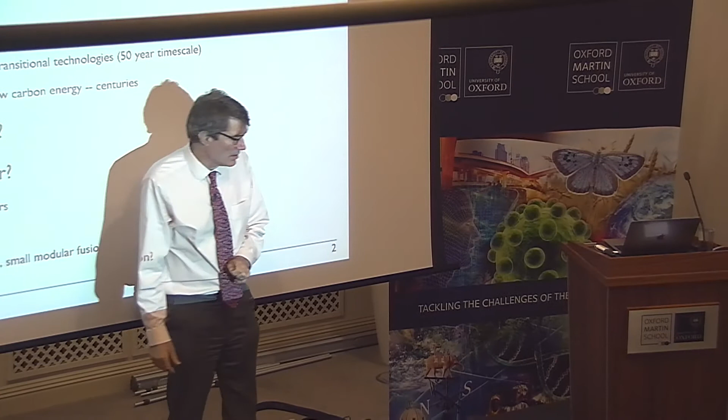And we really have to stabilize that issue. That's not an issue about decarbonizing, it's just an issue about making sure that we have enough capacity in our system, because if we have an accident in probably 2 major power stations, we will have blackouts, and that's probably too risky at this point to be in a situation like that.

The second stage, which is really the 50-year timescale, is about decarbonizing our energy supply at all costs. So here we might be looking at transitional technologies, technologies that don't really scale to the fully sustainable. They're not scalable to centuries. They're scalable maybe to 50 years, maybe to 100 years, but will have to be replaced by more sustainable technologies in time. But they are the technologies that we can deploy now so that we can start tackling the problem now.

And I look upon conventional nuclear to be one of these transitional technologies, and carbon capture and storage to be one of these transitional technologies. Then the stage 3, which is really on the centuries time scale of whatever plan you have.

This is way beyond the UK plan at this point, but the stage 3 would be the sustainable technologies that we can look upon centuries and millennia in terms of their applicability to supplying us energy. And there, I think we really do have to understand how we integrate a lot of renewables and possibly a lot of advanced nuclear too.

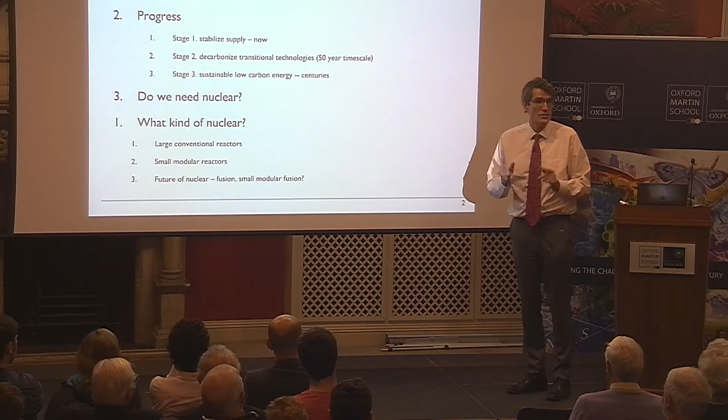Well, between 2008 and now, we haven't really even started building one of those nuclear power stations. And the question is, do we need to? What should we do with that issue right now? We have failed politically and economically on that problem, but should we still be pursuing it? I have an answer, but maybe I'll reveal it later.

Do we need nuclear, and what kind of nuclear? So actually, you can pretty much guess what the answer is because I'm going to talk about what kind of nuclear. But we'll talk about the problems that we're experiencing with the large conventional reactors. And Hinkley Point, which is supposed to be the first of the new generation of British reactors, is a poster child, really, for the problems that we're having with large conventional reactors.

There's an enormous amount of excitement in the UK now, and for some time in the US, about making small modular reactors that can be manufactured rather than constructed. So they're made in factories, they're put on big trucks or railway cars, and they're shipped to the site where they're deployed so that you have construction times that are in a few years instead of construction times in a couple of decades.

And whether that is a good idea, how it could be deployed, is a big question that our government is wrestling with at the moment, and there's a large consortium talking to government, led by Rolls-Royce, about whether small modular reactors are something we need to do.

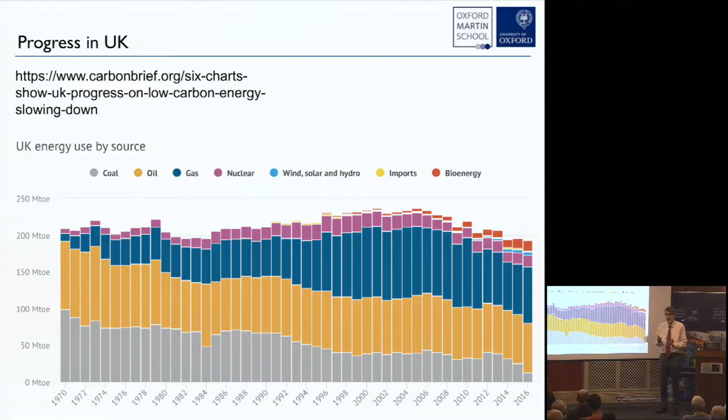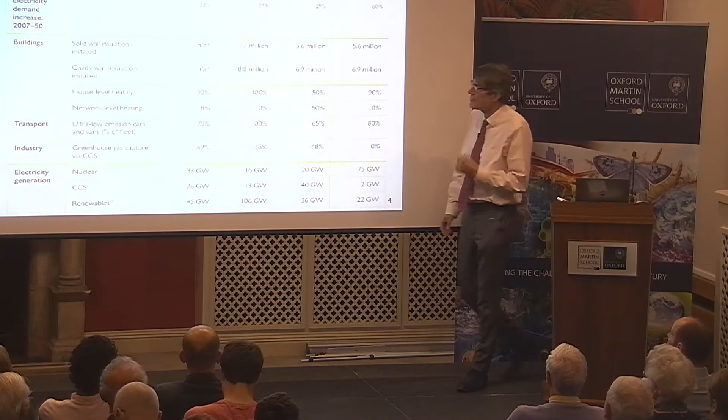Now, part of the problem right now, of course, is we have almost no new plans being formulated in government in Whitehall at the moment on any of these subjects, because we're very much focused on Brexit and all the issues to do with Brexit. So we have to go back to look at the carbon plans in previous times to see what government thought we might be doing in terms of deployment towards the 2050 goal, which is an 80% reduction in greenhouse gas emission from the UK. These are model scenarios, and this was in the Department of Energy and Climate Change 2011 carbon plan. And unfortunately, it's quite difficult to read this, so I'll point out some key numbers that are here.

This is basically, this is talking about what energy savings they assumed we could get per capita. So, for instance, this is 50% here, 54%, 43, 31. These are different scenarios. This is what they call the core scenario. This would be more renewables. This is more carbon capture and storage. And this is lots of nuclear right here. And the key things that we're going to be delivering, and the other part to this is that electricity demand will go up, because we're essentially using electricity to replace many other things.

I kind of like wandering around waving my arms about, if that's okay.

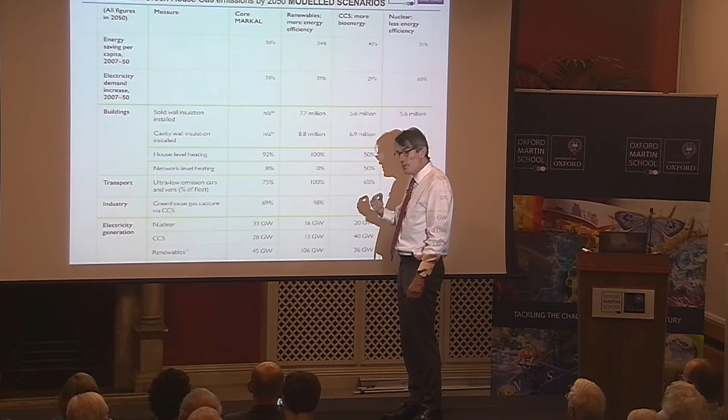The electricity demand increase assumed in these models was 38% here, 39% here. This is the kind of thing you're doing with heating and insulation and low emission cars, etc. They're assuming we can do a fair amount of carbon capture and storage within these scenarios.

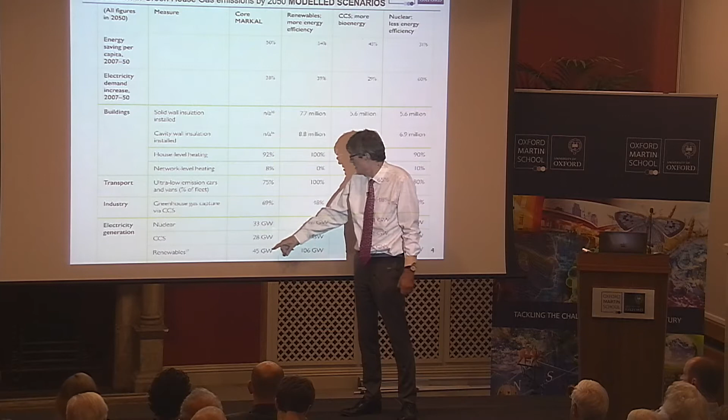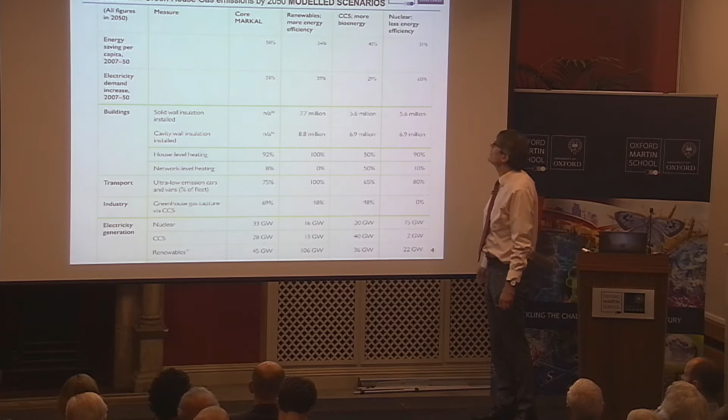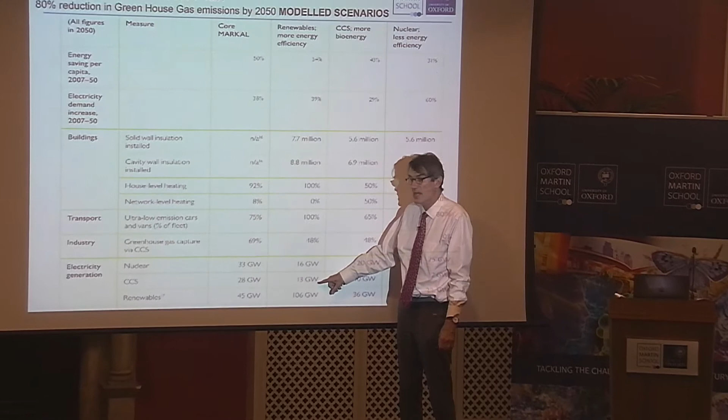Here in the electricity generation, for instance, there's 28 gigawatts. In the core scenario, there's 33 gigawatts of nuclear. We currently are at 10. 28 gigawatts of carbon capture and storage, and 45 gigawatts of renewables in that system. Right. If we look at the lots of renewables one, it's 16 gigawatts of nuclear, 13 gigawatts of carbon capture and storage, and 106 gigawatts of renewables.

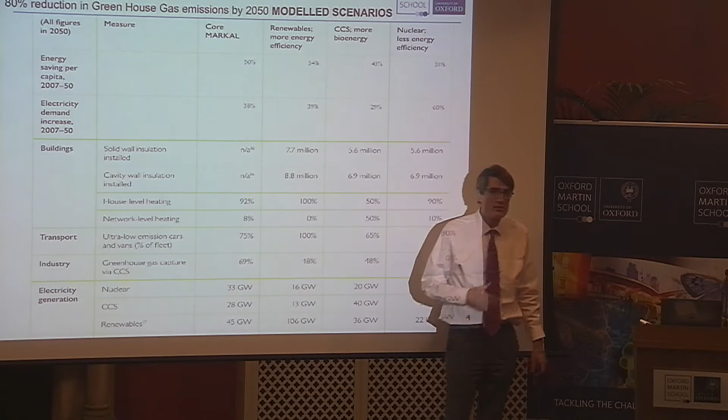Part of the problem with these scenarios is that there are certain technological things that would have to happen in order to make it possible, for instance, to work with 106 gigawatts of renewable capacity, and that probably means storage, certain kinds of backup, etc. Those are not modeled fully in the models that come out of this.

But this was the kind of thing, and I did want to point out, this is the big nuclear one, 75 gigawatts of installed nuclear capacity. Now, with your nuclear, you run it probably 90% of the time, so a huge amount of your energy in this particular scenario would come from nuclear power stations.

These were the scenarios in 2011, and David MacKay, who wrote that wonderful book Sustainable Energy Without the Hot Air, was the chief scientist of DECC at that time, and he was supervising the modeling that went behind this. It was the time at which we were looking to have a strategic look at what we needed to deliver to decarbonize by that time. Within government, there's been almost none of that since then. There's been some. Within universities, there's been plenty of work like that, and it's not my expertise, so I should really not say too much.

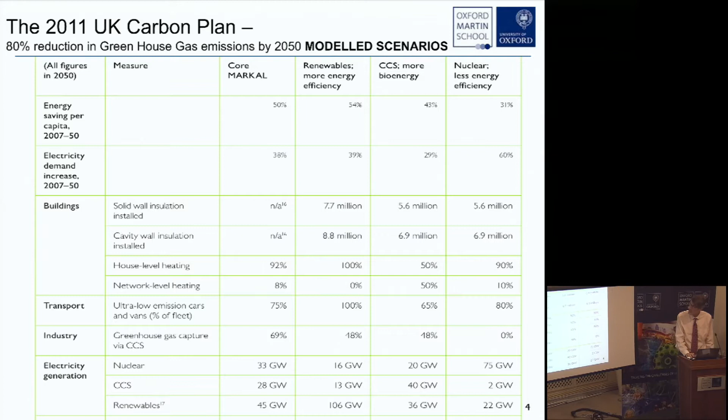I think what was great about the last few years has been that the cost of renewables is starting to make an important dent. 5 years ago, if you talked about offshore wind with investors in renewable energy, they would say, not touching it with a barge pole. What you really want your costs to be is around £50 per megawatt hour. That's what you want your cost of electricity to be competitive on the market right now. The cost for offshore wind was peaking up at 130, 140 pounds per megawatt hour. That would make it extremely non-competitive in the market.

And yet one of the big hopes for the UK is to deploy a lot of offshore wind in places where people don't worry so much about having something in their backyard, and where the wind is very consistent, so you get very little intermittency in the power generation. What we've seen is actual delivery of offshore wind around 97, 100 pounds per megawatt hour, but we've seen auction prices now dropping to around 57 pounds per megawatt hour. So we're seeing offshore wind catch up here.

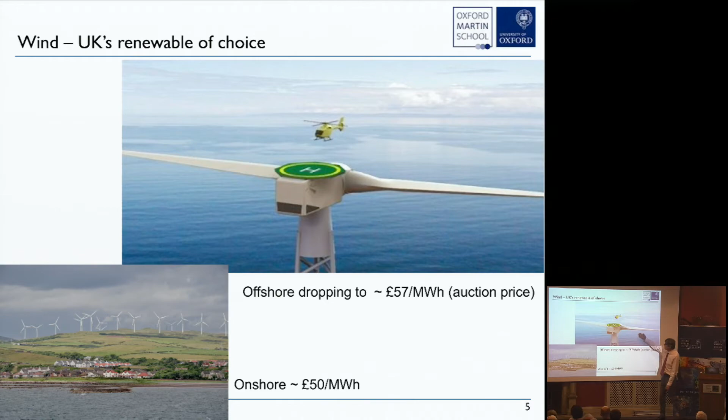Part of that is to do with sorting out the financing, but part of that is also sorting out the engineering. There was an initial phase of putting in offshore wind turbines with a lot of engineering hiccups and a lot of time taken with maintenance and construction, and we were learning on the job. About 5 years ago, there was a complete dip in confidence by government and investors that this would really work out. But fortunately, people persisted, and a very short time later it's starting to pay off. We will be installing, I think, some tens of gigawatts more in the next 5 years, which will make a huge difference to us.

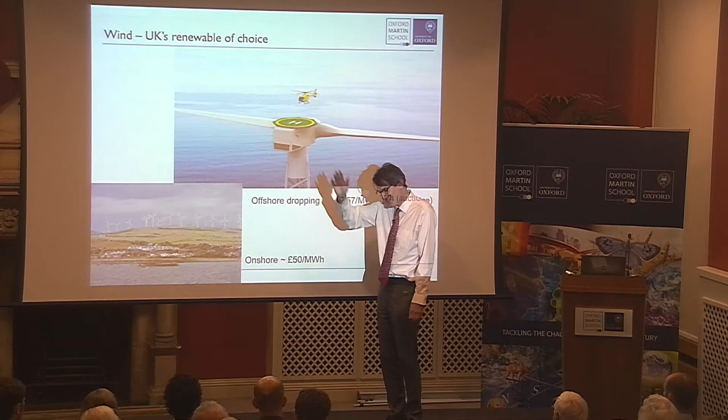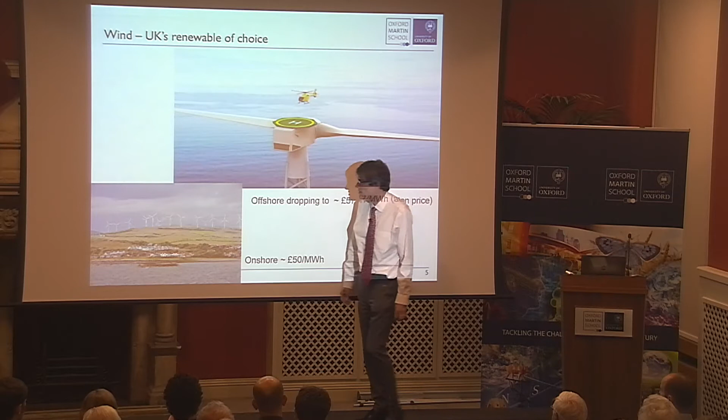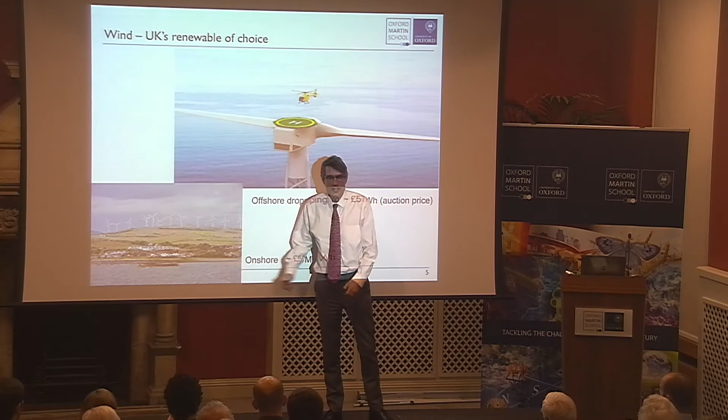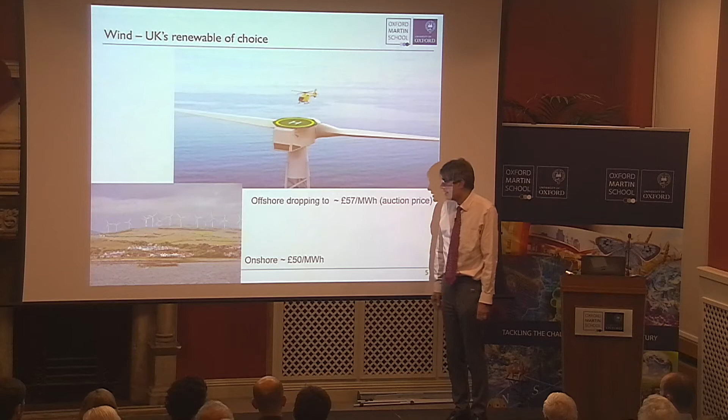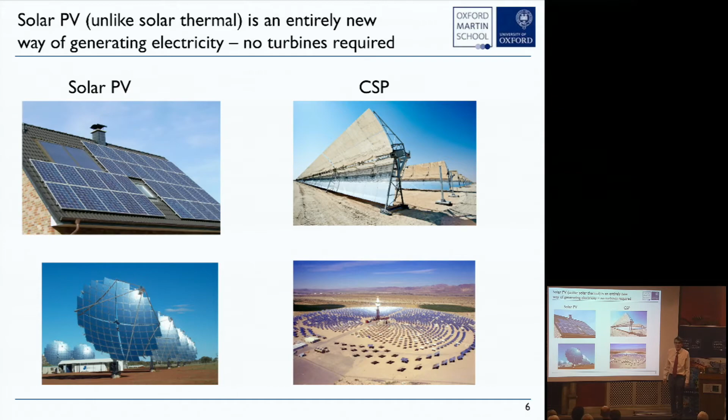Unfortunately, they were essentially driven out, because the Chinese got into the market of making photovoltaic silicon photovoltaics, and the price...

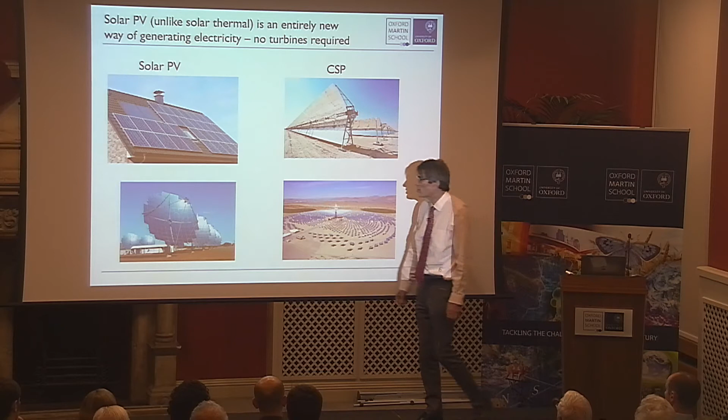...has been coming down absolutely remarkably. And they're starting to be a very cost-effective way in sunny climes to make electricity.

I'm not going to belabor this point, because I'm not an expert, and because at Oxford we have some wonderful people in solar, but this is something I think you may have seen last week.

It's about the price of solar energy, essentially for a kilowatt hour, coming down with time. Here's 2000.

Here's 2050, here's 2000. Of course, it's extrapolation from here onwards.

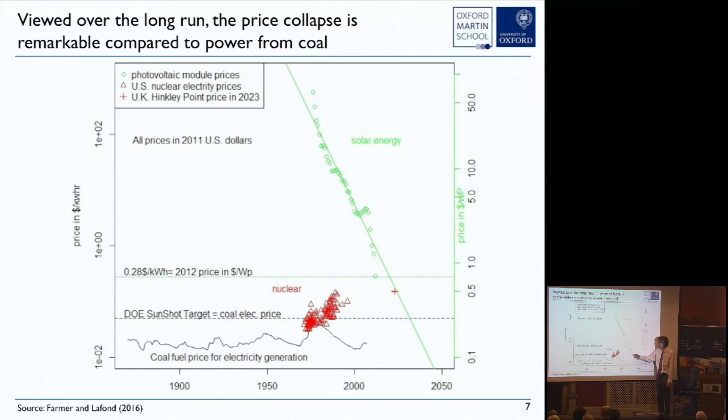This is the price of nuclear electricity existing. This is, unfortunately, the price projected - well, it's what's called the strike price, the guaranteed price of electricity coming from Hinkley Point, which will be our next, which may be our next nuclear power station.

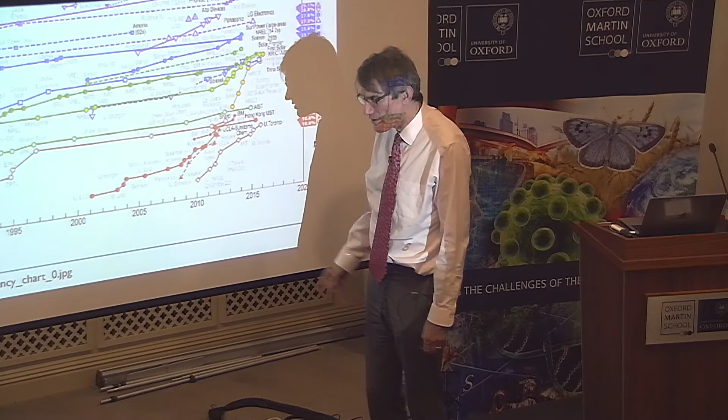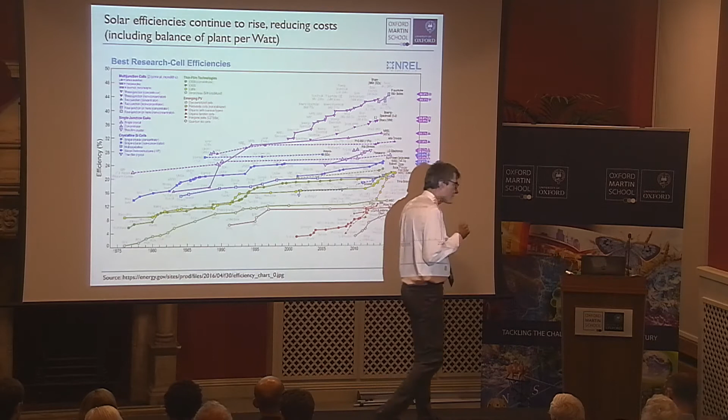I think one of the things here, as a scientist, is - and we've got some marvelous work going on here in Oxford in Henry Snaith's group up in physics and his company - there's a lot of innovation going into the next generation of solar cells, and the efficiencies will go up.

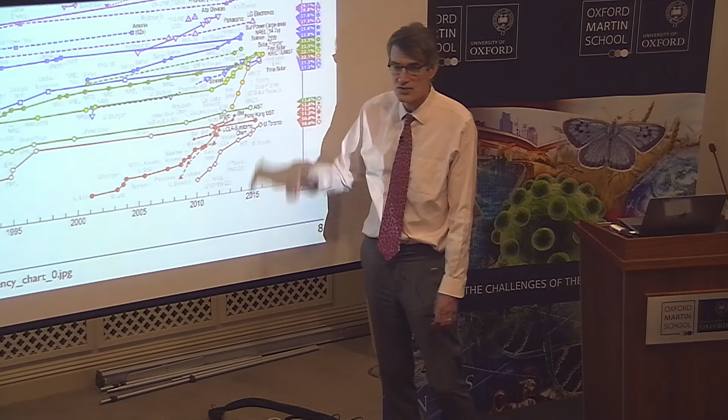Every time the efficiency goes up, it becomes more and more cost effective to use those cells. I think the efficiencies have to go up more than the prices have to go down now, because the prices are so small that really it's not the solar cell itself that's costing you money.

It's all the other things that go around it - it's the aluminium frame, it's the wires that come in, it's all the other things. And so the only way we can actually drive the price a heck of a lot more down is to get more from the same area.

These rises in efficiencies - this is basically the efficiency in percent - and we're working around 15 to 20% efficiency with the standard installations at this point.

If we can push that up by 50% or 100%, it's just a direct impact on the cost and effectiveness of photovoltaics.

This is all very encouraging. Five years ago, we didn't think like this. We didn't even think that photovoltaics would have any impact at all on the UK, and it will have some - much better in Spain, much better in Southern Europe, obviously, than in Northern Europe.

I think in Germany the analysis is probably that of the renewables, 20% might be in photovoltaics, and the rest will be in wind, in terms of a sort of optimal mix of what you might do into the future.

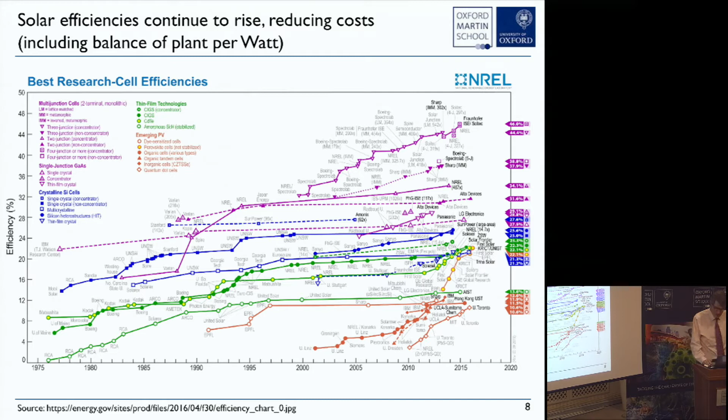The fact that renewables are coming in much faster makes me very happy, because one of the things that was very worrying was we keep finding more gas, more oil, more hydrocarbons, right?

We're never going to be in that situation, which we thought maybe 40 years ago, that we would just run out of hydrocarbons before we had blown the atmosphere. But the problem now is we've got so much hydrocarbons, and nice cheap hydrocarbons, that we could go on using them essentially forever.

Unless we have political agreement that we're not going to dig them out of the ground, and we're going to leave them in the ground, what we've got to do is make renewable ways of making energy cheaper than using the hydrocarbons. That way we don't have to rely on Mr.

Trump agreeing to the Paris Accord. That way we don't have to rely on countries like Russia, etc., because people will be driven to use renewables because they're cheaper. And that would be more convenient, and I hope that some of that will happen.

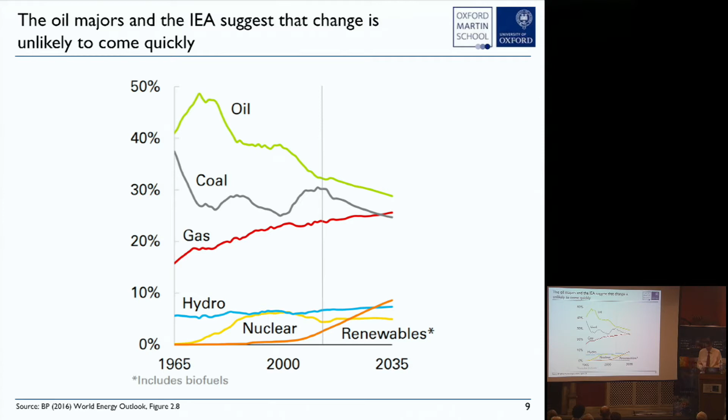Just to give you a scale, a typical day on the British grid in terms will peak at around 40 gigawatts of power being delivered.

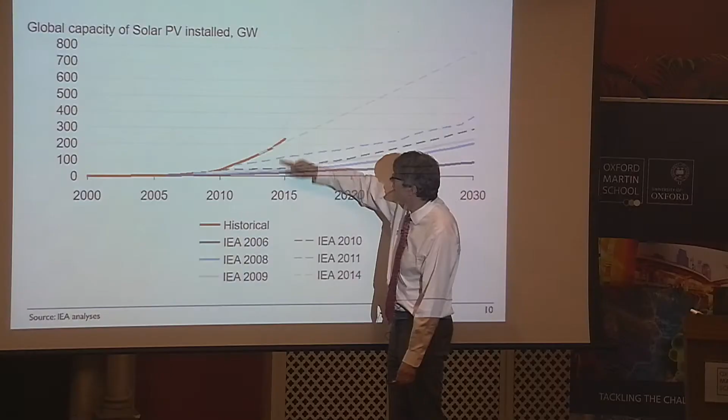They were constantly following the actual line, which is this dotted line here, and adjusting upwards and upwards. There is actually, this is the physicist in me, a second derivative here, so the slope of the line seems to be actually increasing. So probably modeling it this way is not the way to do it. But I think that's remarkable. I don't remember a technological change that caught us so much by surprise against our own predictions.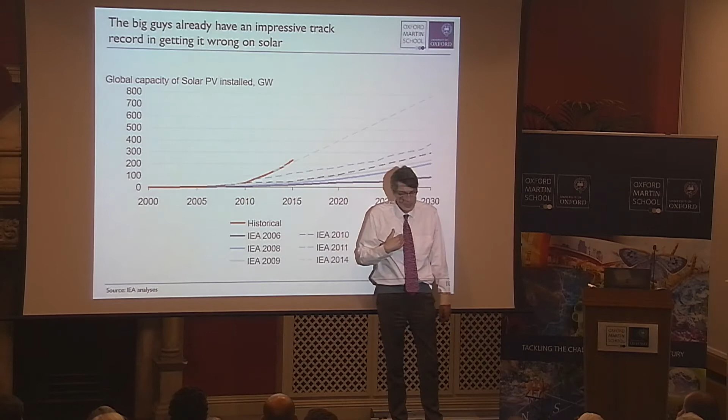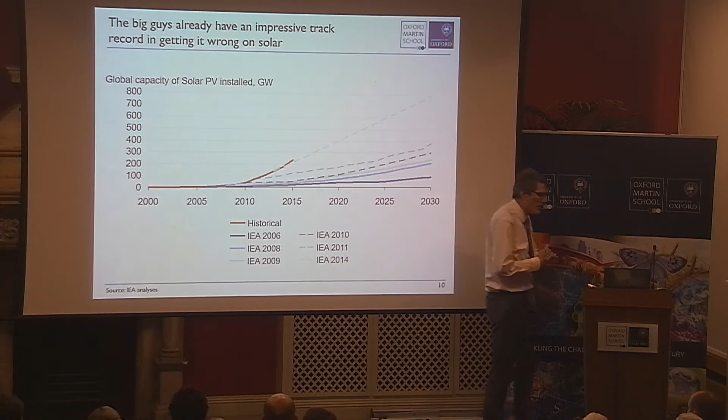Now there are all kinds of ways in which you might say, when you first enter the market, you're going to take the best sites for what you're doing, you put it in the best places. All those things probably are in these figures. But I think we understand that photovoltaics are going to make a big difference to the worldwide energy problem. Probably much less to the UK, more in the line of 10 to 15%.

So this looks great, right? And now we're going to move forward and say we can power our country by renewables, but we can't, actually. And we can't because renewables are not on all the time.

Because photovoltaics only work in the daytime. That's one reason. They work a whole lot better in the summertime than they do in the wintertime. Because the wind is very intermittent, and we get wind power sometimes - we will get nasty, dark Decembers with no wind power, as we did about 2 years ago, in which you just couldn't rely on renewables at all.

A nice analysis of this is given in this paper by Fritz Wagner in 2016, where he is working in Germany and concerned about the gradual erosion of what we call the baseload of the electricity system. That's the things that you can turn on and leave on. Nuclear power stations are like that. They basically operate sort of 90% of the time, and they give you a chunk of the electricity that doesn't go up and down, and you can take some of your load that way.

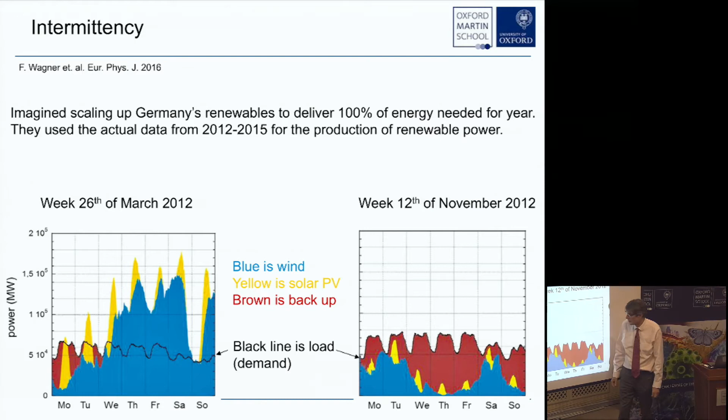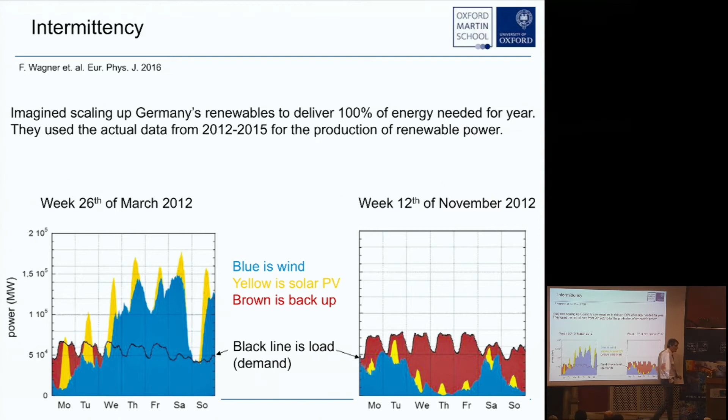If you look at this week here, the 12th of November in the same year, you'll see there wasn't very much wind power and there wasn't very much solar. During that week the backup system was matching the power. This is a well-known problem. They're nowhere near the first people to have worried about this, but it's an interesting analysis because you can quantify with actual data from the system how much of a problem you really have in matching this, and what you'd have to deliver to flatten out the supply.

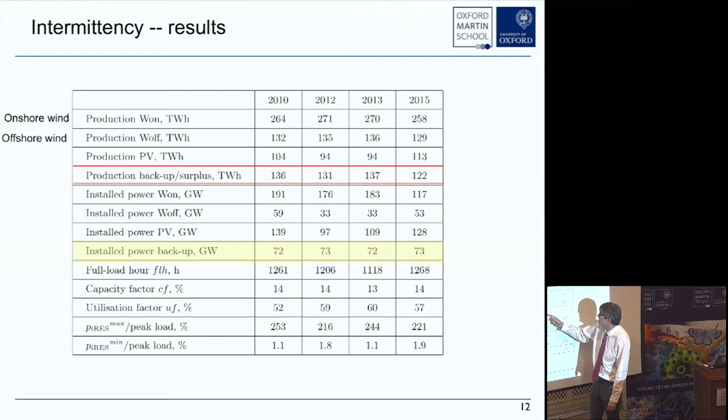What's interesting is, in order to handle those moments when you have no renewables, you've got to put on 72 gigawatts, 73 gigawatts, 72 gigawatts, 73 gigawatts of backup power. And you're delivering quite a lot more backup energy than you've actually delivered in photovoltaic energy during that year, even though you scaled everything up that much.

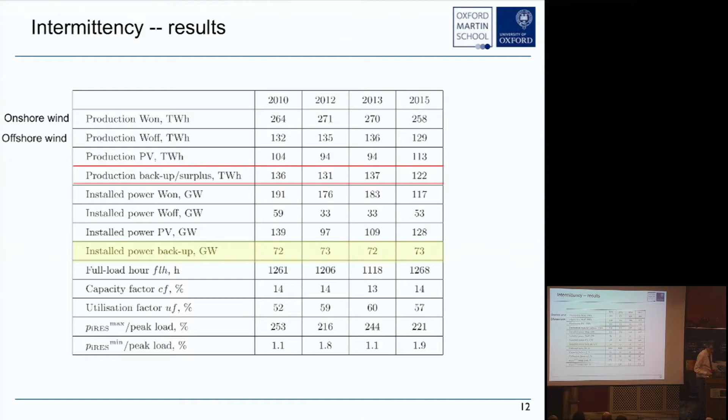Understanding how we cope with that fluctuating load is a technological challenge. And doing it with backup, if we did this with standard backup now, that would have to be something like gas turbines, which would naturally produce carbon. Maybe this would be a natural way to use your carbon capture and storage for a period of time. Maybe that's what you would do with these sources.

I'm not as sanguine about this part of the problem as some people seem to be, but I'm not an expert on energy storage.

Elon Musk is delivering to South Australia the world's biggest battery, that's what it's hailed as. It stores 129 megawatt hours. So basically 6 minutes of Dinorwig power station.

Battery storage for any long-term fluctuations in the grid is a long, long way from being something we're capable of doing. For short-term storage, it's already being deployed, but that's actually very short term. Maybe on the day time scale or the week time scale we'll be doing battery storage, but it's unlikely we'll be doing anything over seasonal length scales - months, 6 months, a year - being able to store energy produced in the high winds of the autumn gales for the middle of winter. That will not, in my view - batteries will never scale to that kind of storage.

And I think we're going to have to look at a variety of options for how we cope with that.

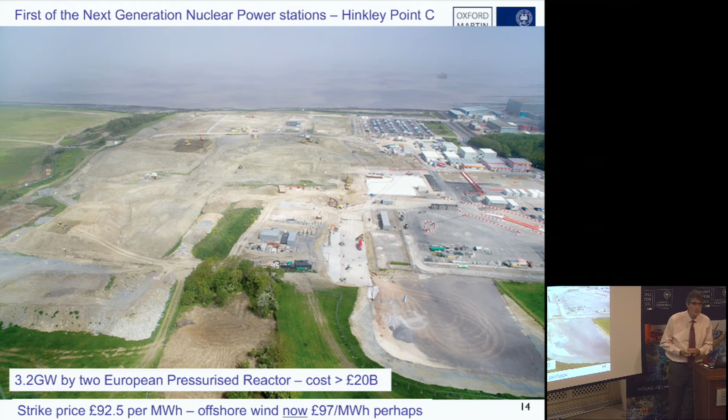By 2025, most of our nuclear fleet will have reached the end of its lifetime. Most of our nuclear fleet is these advanced gas-cooled reactors. They have had life extension after life extension. And as they do, we have turned down the wick on them. Basically, we don't run them quite at full power anymore because they're getting older, and we want to stay in a very safe condition on those reactors. And they're marvelous. They've been extraordinarily safe and good for us. But by 2025, only Sizewell B will still be with us.

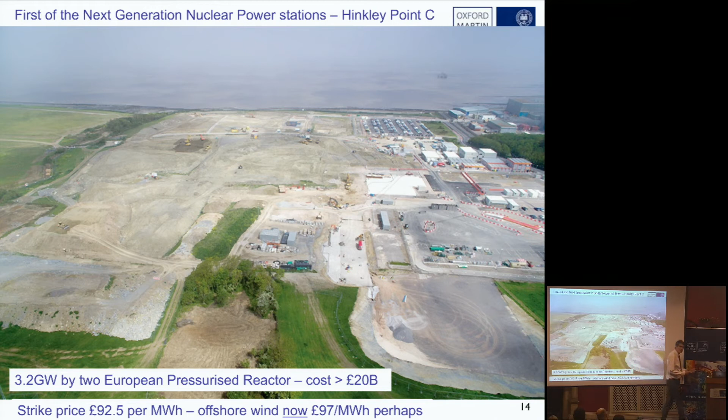So if you get started on building these reactors now, given the rate at which we build reactors, just about by 2025, you'll have 3.2 gigawatts of nuclear power coming online, just as you're losing about 8.5 gigawatts of nuclear in our scheme.

Why is it so expensive? If you take the weight of a nuclear reactor and the amount of concrete in there, and you just built a Jaguar Land Rover that weighed that much, and built a motorway with that much concrete in it, you'd be talking about $1 billion, $1.5 billion worth of stuff. Building nuclear reactors costs much more than the stuff that's in it. The intrinsic cost is very, very low. The cost is all in the waiting around, the licensing, et cetera, right?

It's all to do with the ways in which we keep it safe and keep it licensed and work with that. So people have argued that the problem is that these things are constructed on a site where you can't license them. Now, aircraft engines are constructed in a factory. You put them on a production line. At the end of the production line, they're inspected, they're licensed, and they're put into planes and they fly. I mean, they are re-inspected in the planes, but it's not a long process.

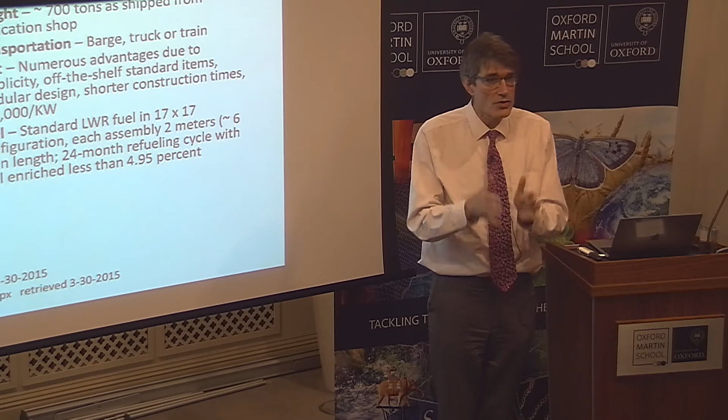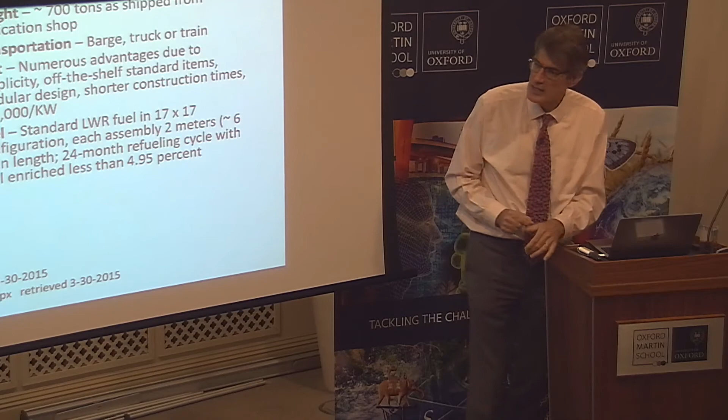The argument is that we ought to be producing nuclear reactors like we produce aircraft engines. We ought to be producing ones that can be made in factories and transported to the site as a thing that you basically plug in. You pour a little concrete on the site, you plug this in, you link it up, and you get it online within a matter of 2, 3, 4 years from the beginning of construction until delivery of electricity. If you could do that, you cut down so much of the cost that's been in Hinkley Point. The cost in Hinkley Point is really the money sitting around for multiple years while you pay interest on it.

So if you could actually make these things, if you could make essentially a factory that produces small reactors, they're called small modular reactors, you could deliver them to the site. Instead of having 2 big ones at Hinkley Point, maybe you have 20 or 15 of these. They're much safer, smaller reactors that are intrinsically much safer because they have more surface area to volume ratio.

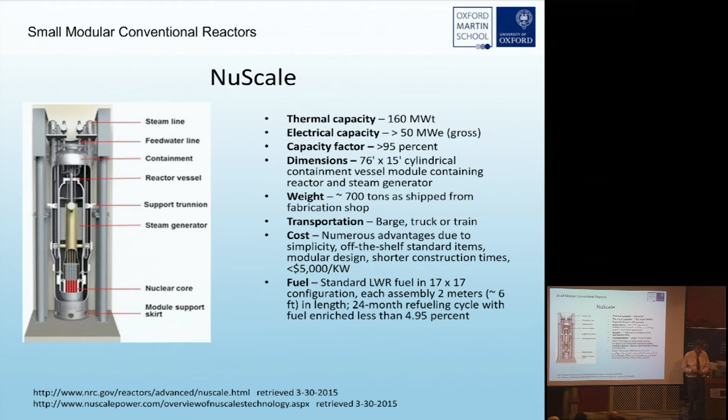It seems like a very good idea. And round about 2000, the US started to put lots of money through the Department of Energy into plans to build these kind of reactors. They've yet to actually make a prototype, but this is the company that they've poured some money into, NuScale. This would actually be a 50 megawatt reactor. And NuScale have been talking to the British government about what it would take to have them deployed in Britain and sold in Britain. The excitement in Whitehall at the moment is of a consortium from Rolls-Royce.

Now, Rolls make a reactor. They make a reactor for the British submarine. It's not the kind of reactor that you would put in a civilian situation, but they have the whole supply chain. So this could be an entirely British-made reactor. They have all the components, all the manufacturing capability to build all the pieces of the reactor, and they've put together a consortium and appeal to the British government that this is probably the way forward in nuclear.

Now, these are very standard reactors, just like the big ones except scaled down. 220 megawatt reactors in pairs is what they're suggesting as a deployment. They have a 60-year lifetime, and they say they could deliver the first reactors by 2028, then roll them off a production line, one every month or two, in order to supply. The target electricity price they're aiming for is 60 per megawatt hour.

I don't know if this is possible. They certainly have a plan to do it, and part of it is that unlike big reactors, you're making many of these, so you learn from the first one, the second one, the third one, and the price comes down. If you look at photovoltaics, that learning is a crucial part of driving the cost down. It's never really happened before in nuclear, except possibly during the 1980s when France built its big nuclear fleet, building one reactor a year with the same people moving from site to site. That's pretty much the only time nuclear has made any money.

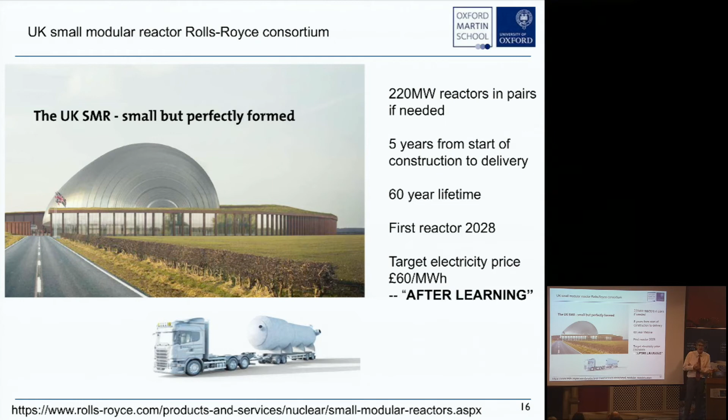So this would be a very bold step. But we're going to have a hole in our electricity generating capability, and if we're not just going to fill it by burning more gas, we have to do something like this.

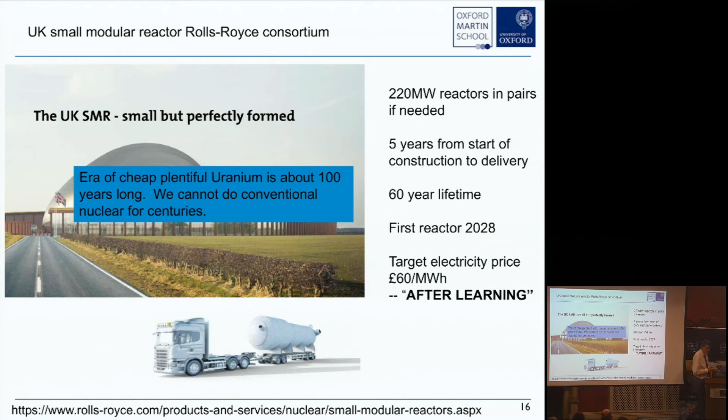There's a thing you don't often hear: it's a stopgap measure, because we don't really have enough cheap uranium to supply the world with a baseload of nuclear for more than about 100 years. It's of that order, though exactly what the number is, is difficult to say. You would have to go to advanced nuclear systems.

I'll say a little bit about fusion, because that's my thing and I enjoy talking about it. The ultimate way, probably the perfect way, to make nuclear energy is from fusion reactions: taking small nuclei of atoms, joining them together, and making larger nuclei. By far the easiest reaction is between two isotopes.

Two isotopes of hydrogen: this is deuterium, heavy hydrogen. Hydrogen has one proton in its nucleus. One proton plus one neutron makes deuterium. One proton plus two neutrons makes tritium. There's a beautiful reaction between deuterium and tritium that makes helium and a neutron. This helium comes out with shed loads of energy, and so does the neutron. If you take that neutron and bombard lithium, you can make tritium, which doesn't exist in nature, plus more helium. So the fuels for this way of making energy are lithium and deuterium.

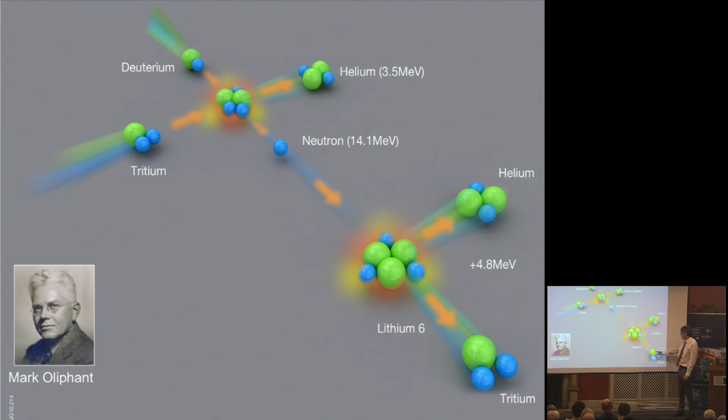There is 60 billion years' worth of deuterium in seawater, and 30 million years' worth of lithium in seawater. It's about 0.2 milligrams per liter of seawater, and it's efficient to separate it out for fusion, but not for batteries, as it turns out. This reaction is great, except for one thing.

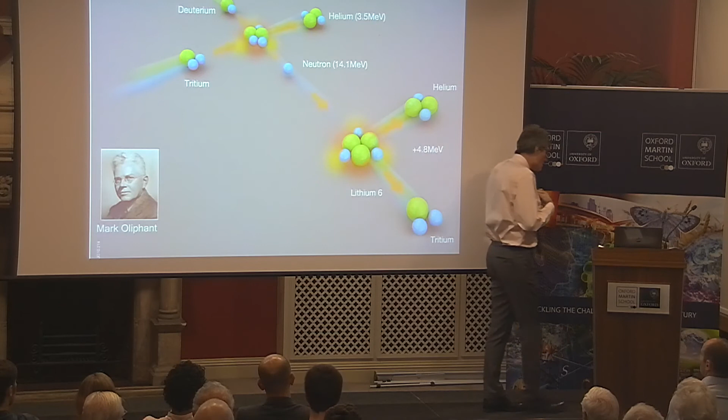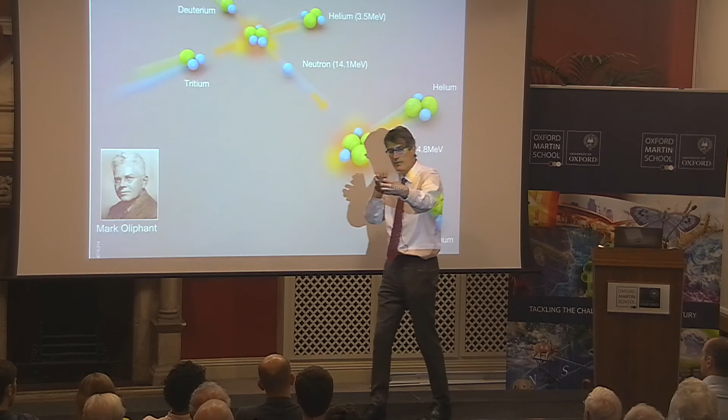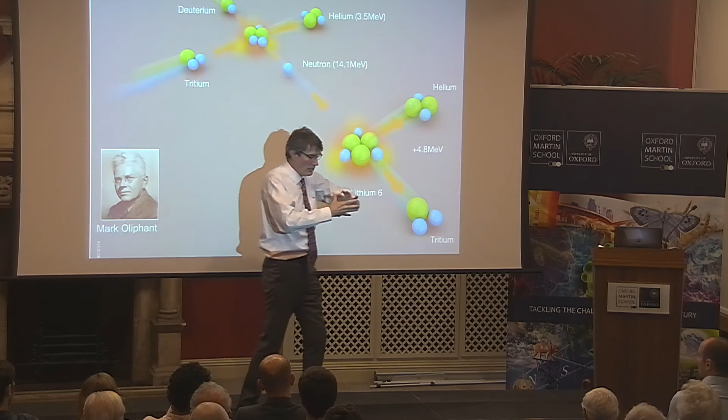In order to make this reaction go, you have to ram your deuterium and tritium together at velocities of order 1,000 kilometers a second, equivalent to temperatures of order 200 million degrees. You have to create deuterium and tritium at those temperatures, hold them in some kind of containment, and let them bump into each other until the fusion reactions occur. Typically they'll glance off each other in any collision, and only when you hit them smack on do they get close enough that, for a moment, they form what we call helium-5, with 5 particles, 2 protons and 3 neutrons, which then splits into ordinary helium-4 plus that neutron.

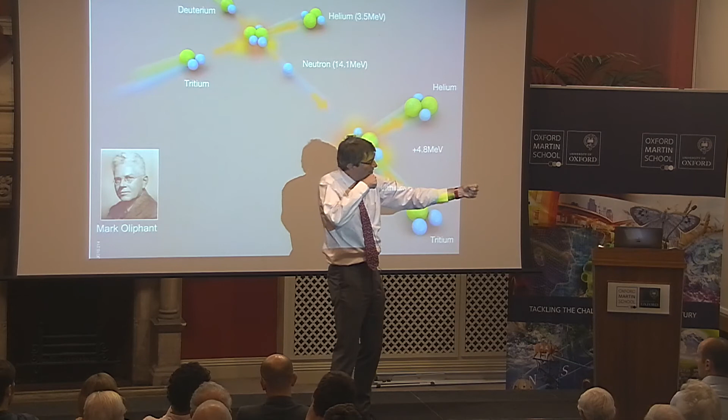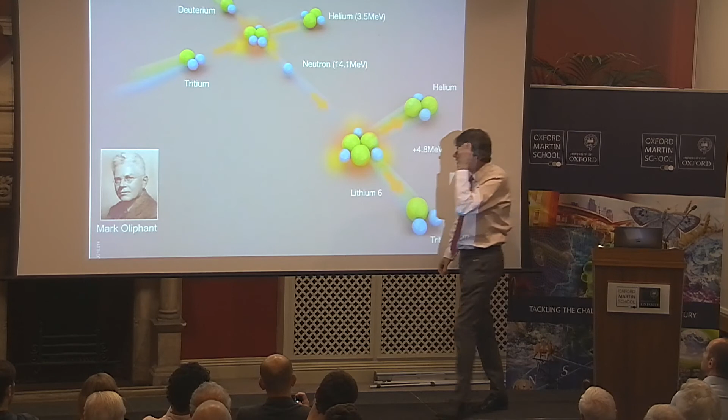When they get close enough, they repel each other until you get very close, and then they grab each other and fuse. We've known about this reaction since Mark Oliphant discovered it in the early 1930s. We've known it would be a great way to make energy, but it's really hard to heat anything to 200 million degrees. We can do it now, but only in very, very large devices.

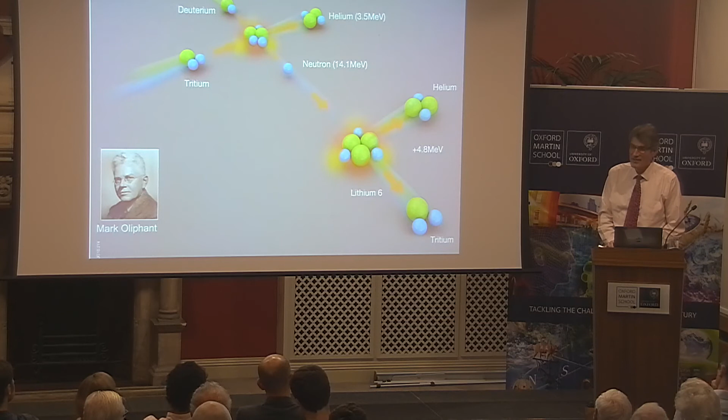So I'm going to go back to this. The world decided, around 2004, that we ought to try and actually achieve a self-sustained fusion reaction.

And they formed a consortium of countries that includes the European Union, America, Russia, South Korea, Japan, India, and one other, which I've forgotten, to build an enormous device in which you can hold deuterium and tritium in a magnetic field at 230 million degrees and cause it to fuse.

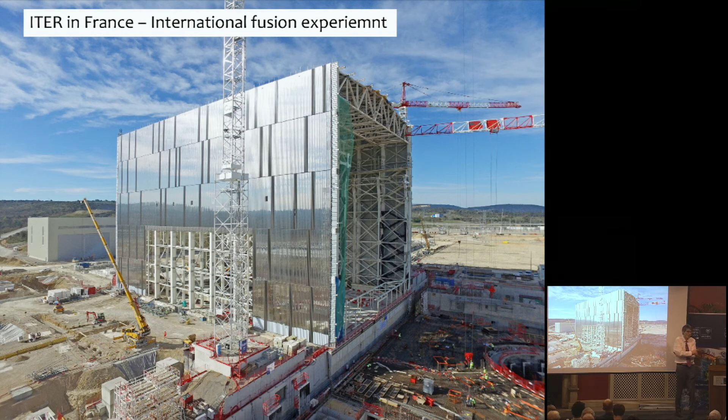And this is the device that they're building, and this is a picture from about 4 months ago. This is just the assembly hall. The actual machine is going to go here and will be, as the building's as tall as that, a phenomenal piece of equipment, and from a scientific point of view, a marvelous experiment.

What will it do? So in here will be your deuterium and tritium. You hold it in great big superconducting coils. You hold this thing at some temperature like 230 million degrees, and the deuterium and the tritium make your helium and the neutron. And the hope is that we'll make half a gigawatt of fusion power.

Yeah. I'm over time and I'm being signaled to.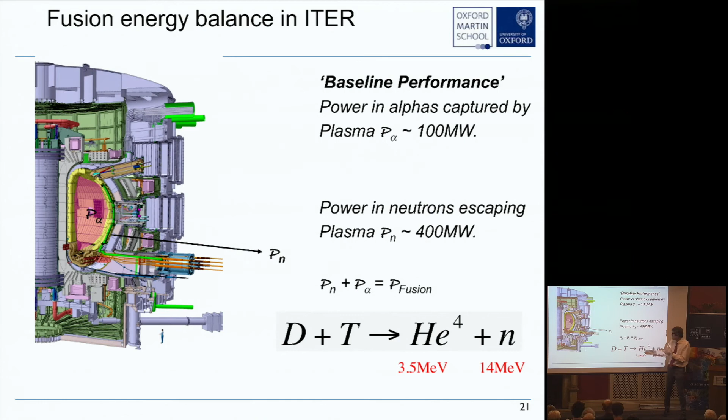Half a gigawatt of fusion power. This would be the first time that the fusion would be self-sustaining. When the fusion produces power, it produces this helium. And the helium can self-heat the fuel. And if you self-heat the fuel, you can get it up to temperature, and then you don't have to pour in any more heat, and it will continue to burn, just like a little star, because fusion happens in stars. And ITER is designed to do that.

But unfortunately, this experiment's costing about 15 billion. It makes half a gigawatt of thermal power. So if you hooked it up to make electricity, it'll make about 200 megawatts of electricity. It's too big to be a commercial power station. If we're to make fusion a possibility to actually power our homes, we've got to drive down the scale and the cost of this technology.

Now, it's typical when you first introduce a technology that it's too big, too expensive, etc. We all know that. But how are we going to get from this big clunky thing to something that actually delivers electricity that you want? Well, we've had some ideas. Just down the road at Culham, we're pushing on an idea to drive the cost and scale of that down to a manageable scale where we would be able to deliver to the market sometime in the second half of this century. Now, if fusion's to be needed, it's to be needed on that time scale. We don't need it now, but we do need it probably for the long-term sustainability.

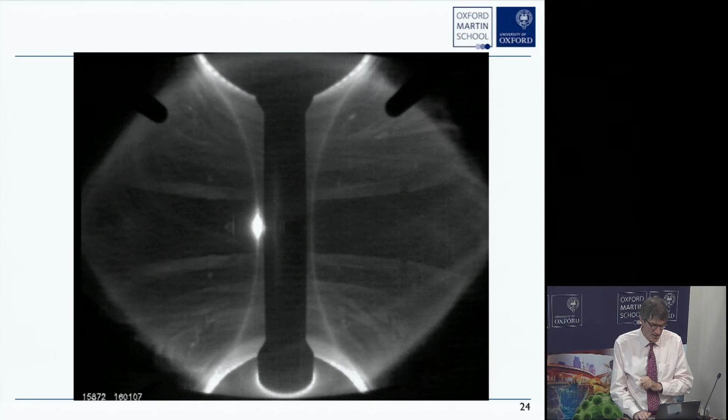Here's the prototype of the machine working. You can see that this is at a temperature of about 30 million degrees. And what was lovely about this is it starts off all kind of turbulent and messed up, and at some point, it comes into this beautiful state of being contained. That's what you need to make fusion work. You need a beautiful laminar state of the fuel, that's only deuterium in there.

So about 2009, I persuaded the British government we should try and improve on this and build a new version of this. And I thought I would close by showing you that. So about 2013, we began to build a machine that should get us around about 100 million degrees in a machine that's not much bigger than me. Well, it's a bit bigger than me, it has to be said.

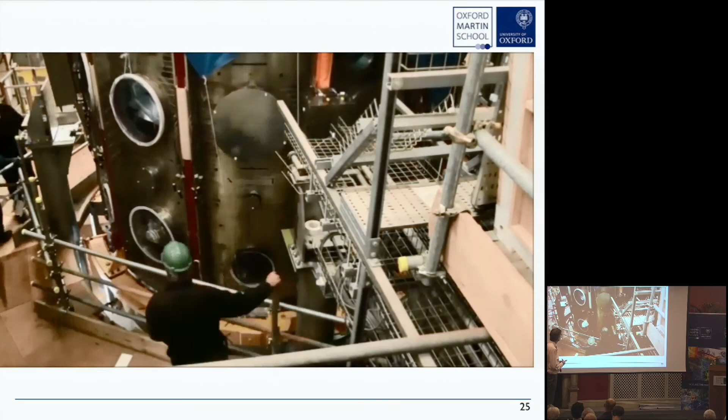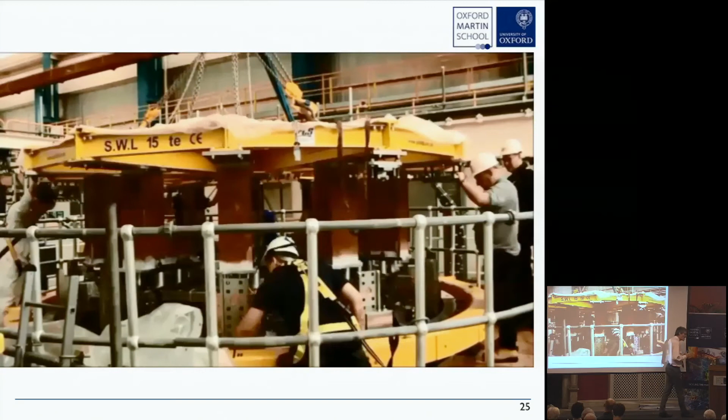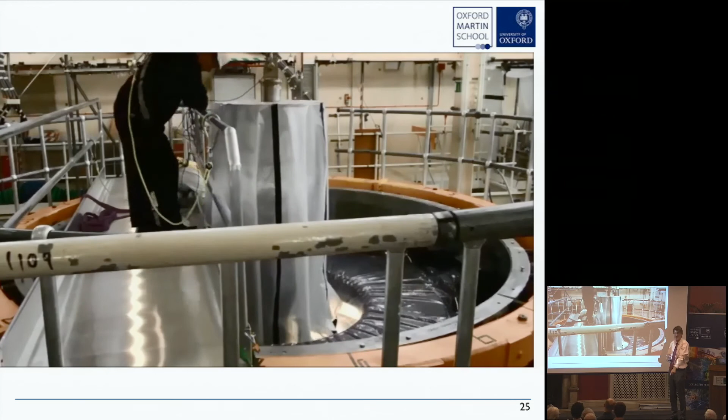But this was the construction of the experiment, a bit speeded up. We don't work that fast. It is a design that may be able to get us to a burning fusion system in a machine that's not much bigger than the height of this room. So maybe a small modular fusion reactor.

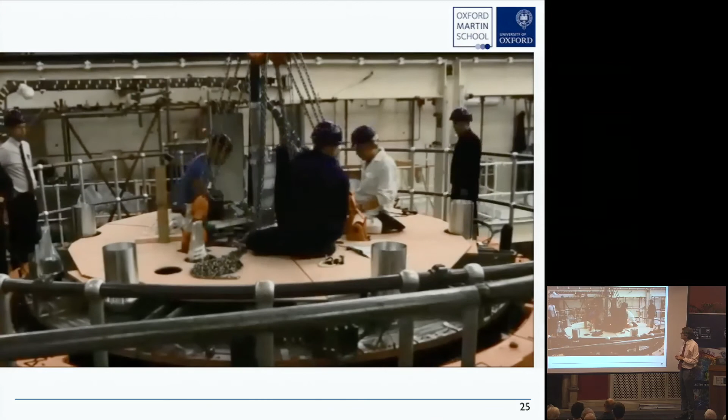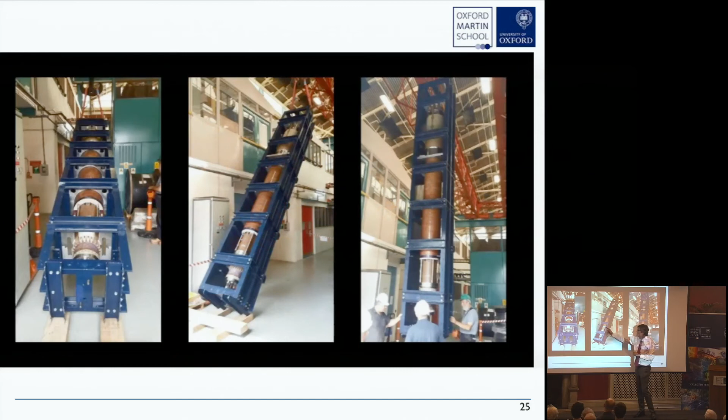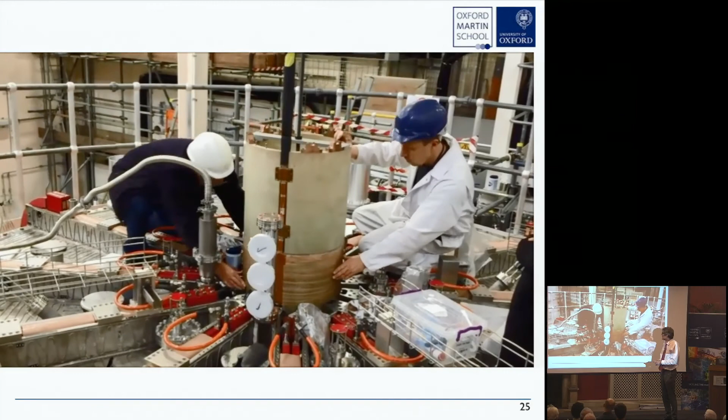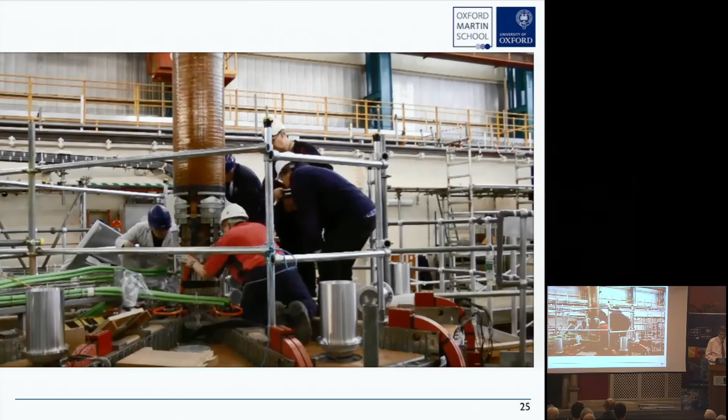This was the lid going on. That's the machine as it looks. This is the center column going inside it, the major driver of the magnetic field inside the system being lowered into place. And commissioning is sort of starting on the machine right now. It's a bit delayed because we had a leak, but hopefully physics results next year. We promised the European Union physics results next year. Now, will we be in the European Union next year is a big question, but that's what we promised them.

I hope I've convinced you that there is work to be done, because I don't want us to be complacent about the solutions for energy. We don't have a sustainable solution yet. Maybe it's energy storage plus renewables, but I think we should be looking at the advanced nuclear solutions as part of the mix and what goes forward. All solutions must be tried. Actually, it's an existential question for us all that we solve this problem.

And that's my thing, bring down the cost and scale of fusion. Thank you very much.

We will try and have some gender balance in the questions too. This gentleman, I think he...

My name's David Dent. Clearly you're committed to this great big fusion adventure. Down at Hinkley there's a lot of earth scraping, but the French can't do it, and they can't do it at the price anyway. So Hinkley's probably not going to happen. Why did you say it's a high risk going for these modular small ones? It strikes me as it's a very low risk solution for the problem at the moment.